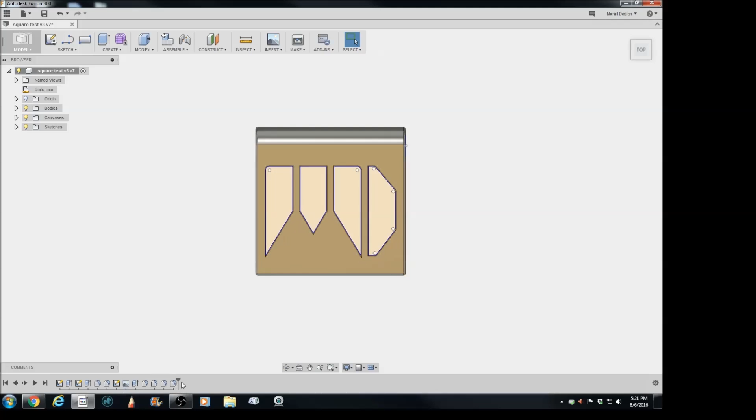So this is Autodesk Fusion 360. You can see I've registered under my business name, Morale Design. This is my logo, and we'll see when that comes into play, because there's a feature tree on the left-hand side that tracks how you create your part, and it also has this breadcrumb trail showing all the features used to create it.

This is a pretty simple design. I just wanted something a necklace would pass through, so it has a pass-through here and goes out the other side.

I'm still learning the software, so forgive me if I'm not using it the best way — there are a lot of tutorials online on YouTube for Autodesk Fusion 360. This isn't going to be one of those videos; I'm not doing instruction. I'm just showing you the process: you can play around with software like this, then upload it to Shapeways and try to merchandise your YouTube channel.

Assuming your YouTube channel isn't geared around CAD work or 3D printing, you might be doing something like social commentary or comedy, and you might feel put off from doing this kind of stuff. But really, it's not as difficult as you'd think — they teach this in high schools, so it's not hard to pick up. You just have to give yourself permission to really have at it.

So let's take a look. We'll start at the beginning where you create a sketch — you can see I kept it simple and small, 20 millimeters, just big enough to be like a pendant size. So once you get the base shape down...

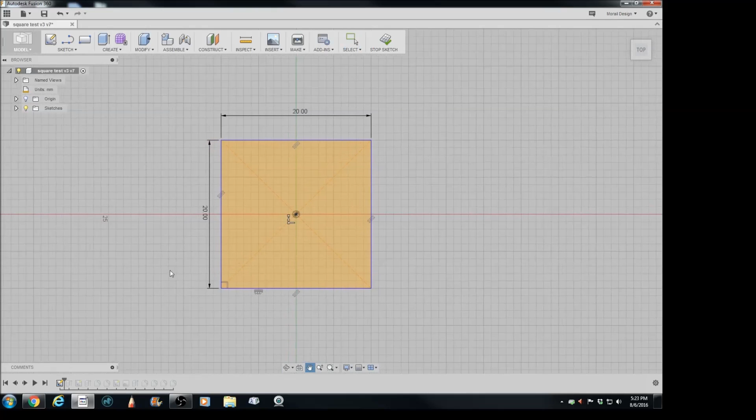Let's see if I can do this — stop sketch, and then you extrude it. You can see first you create the sketch, then you make the feature based off that sketch. If I'd made an octagon, it would have been an octagon; if I'd made a circle, it would have been a circle. But I told it to make a square and extrude it out.

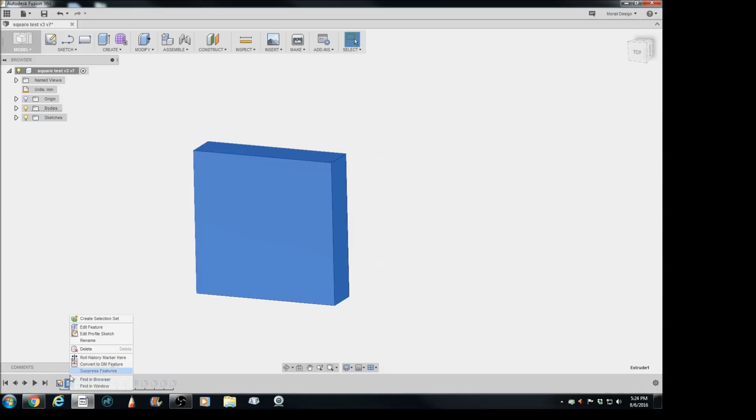How much did I extrude it out? Let's see — edit feature, 5 millimeters. It gives you handles where you can change this kind of stuff. It's a pretty interesting tool; looking forward to doing more work with this.

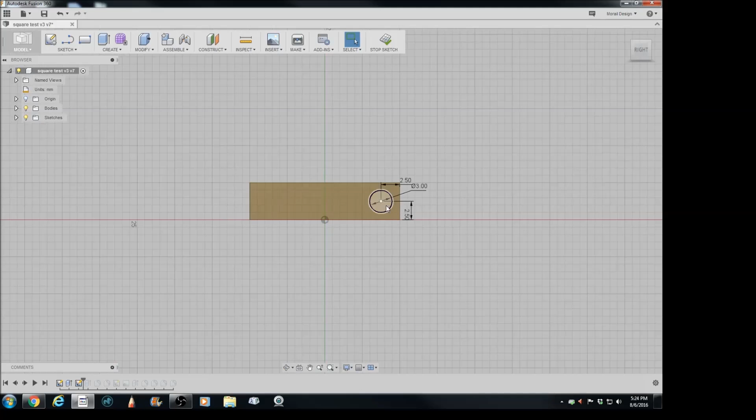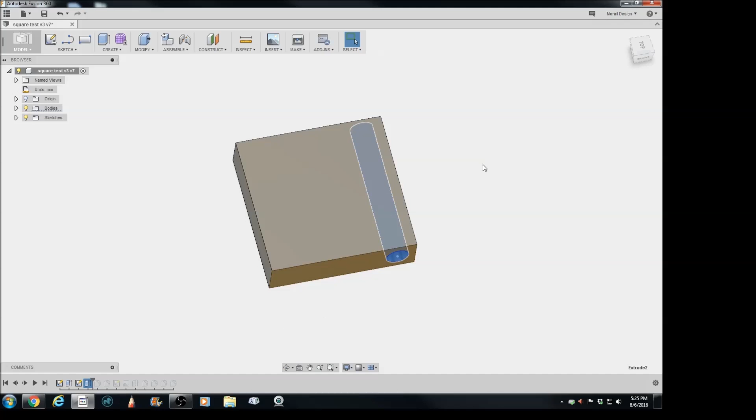The next feature would be creating the hole going through it. In this case, I used this face as the plane to create the geometry, and once the geometry is created, you make the feature. Again, it's sketch, feature, sketch, feature — that's essentially the way things go in CAD.

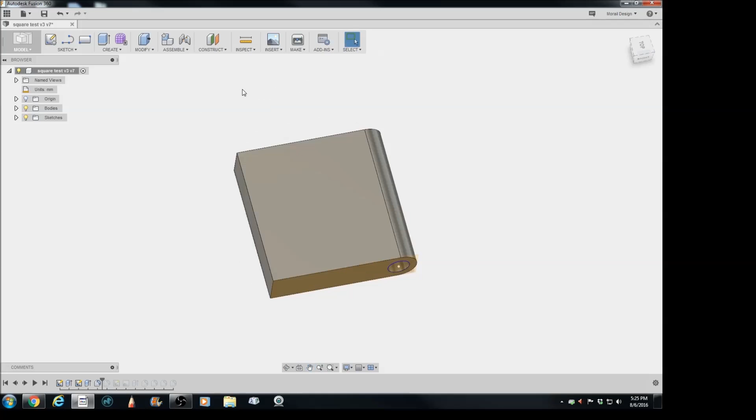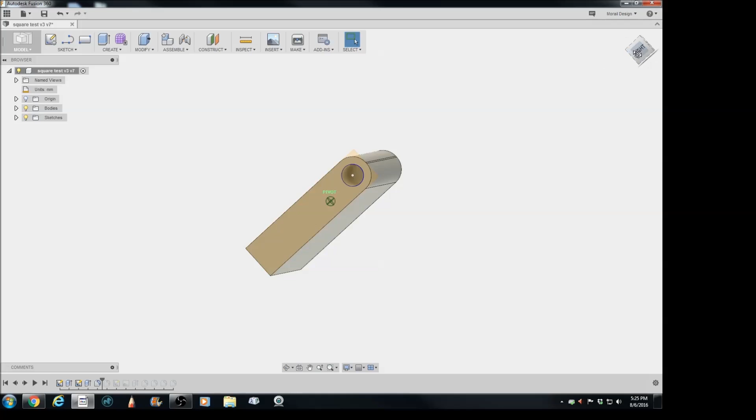You create your base geometry and paint your picture, then you use your features to make it three-dimensional. So now this hole goes through it, and then I created a roundness called a fillet on both sides. So now you don't have to pay for that much material when you go to 3D printing, because some of it's based on the overall volume and size, and they charge you based on how much material you're using.

So anything that's not a value add, I'm going to have some spaces where it wasn't a value add, and we'll go over that. But right now it's one big hunking block. So again, more fillets, radius out some areas, break the edges, because you're going to be wearing this as a pendant, and you want to limit the amount of sharp areas on it.

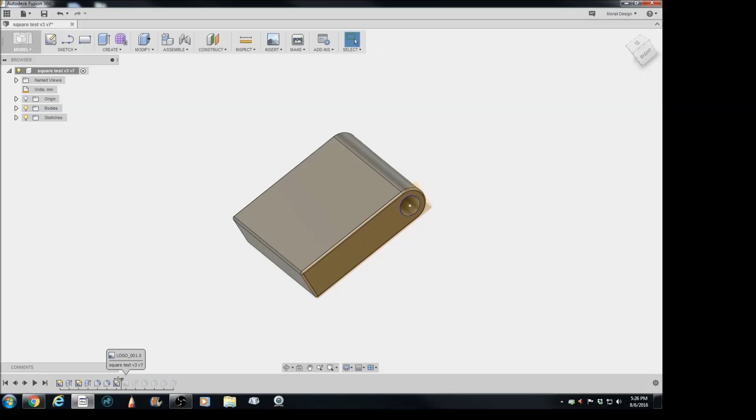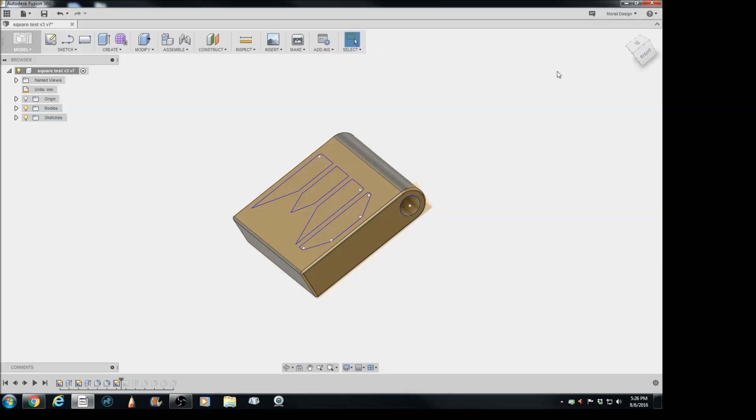And then I inserted it. You can go to the insert tool, insert a picture, and I did that with my logo. I have a bunch of pictures of my logo. You can see it in the lower right hand side of my YouTube video, where the logo is able to pop up on you. And because my logo has a lot of straight lines, it was easy to trace over the logo.

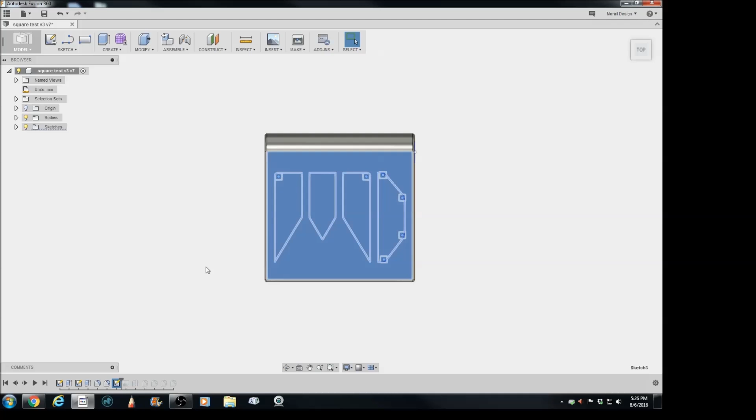And of course, being a CAD designer by trade, I went through and dimensioned it all too. So if I actually went into this and took a look at it, yeah, I dimensioned it all.

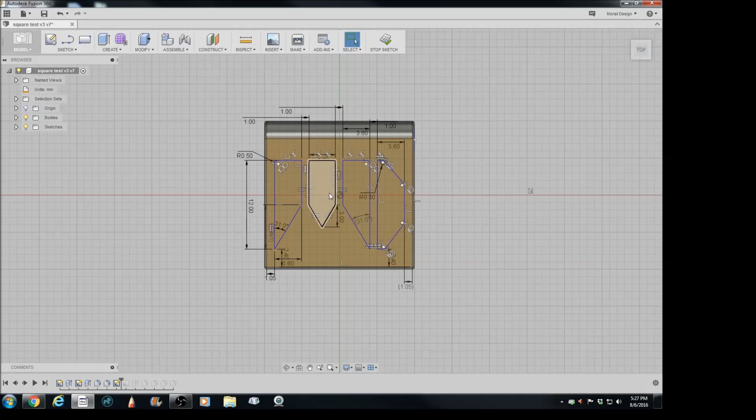I wanted to make sure that I had at least a millimeter for the rails, because the 3D printing method used in Shapeways states that if you have walls that are less than, I think, half a millimeter, they're not going to bond right. So I doubled that, and I think I should've even gone thicker, looking at the piece now. But I wanted to make sure I had rails that were thick enough to survive the additive manufacturing process, and make sure the sketch itself is kind of centered.

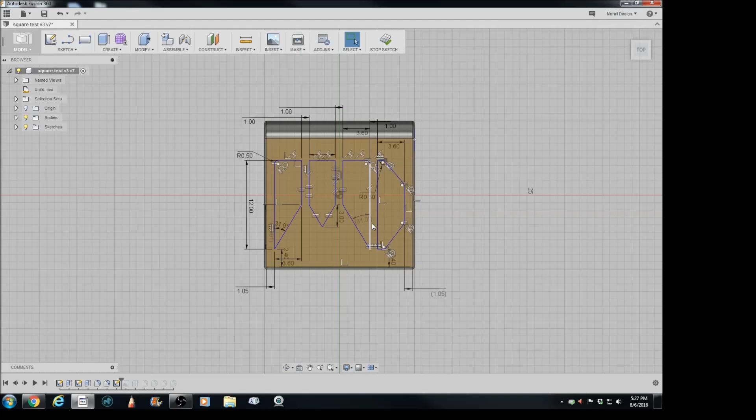So I took some reference points and made sure the overall logo is centered on the piece itself. That was fairly simple to do, and these are all the sketch tools that you can use. It's not difficult at all. So let's see, the next step was...

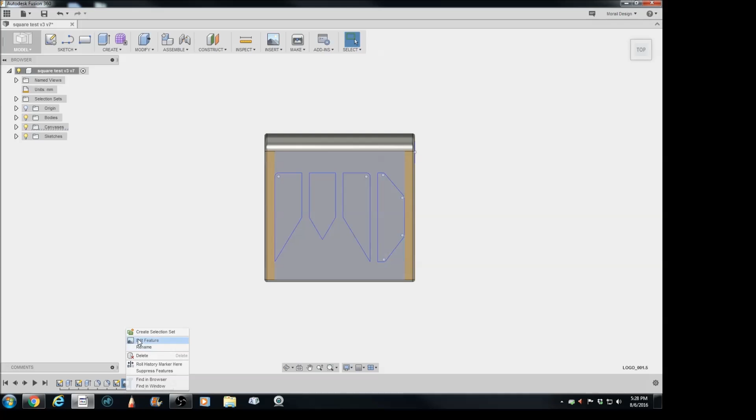Oh, this is the image. It still retains the image. So as you can see, the sketch came away from the actual image. So however I made this, it looks like this is a little more spread out than the actual image by a bit, because you can see some of the after image from here and here. So my actual logo is a little more condensed than the 3D printed one.

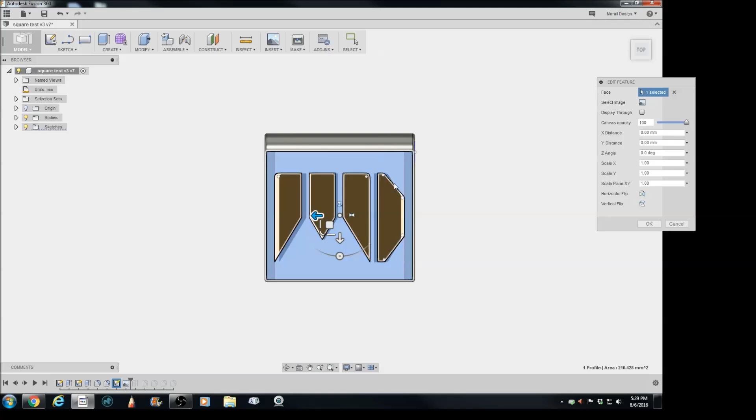Could be part of the conversion from JPEG to the application I used to make it, to importing it. I also, you can see in my logo I have a thicker boss on the top and the bottom of the D, where the angle I used didn't really match the logo, but that's okay. I think the overall intent was maintained, so we're good with that.

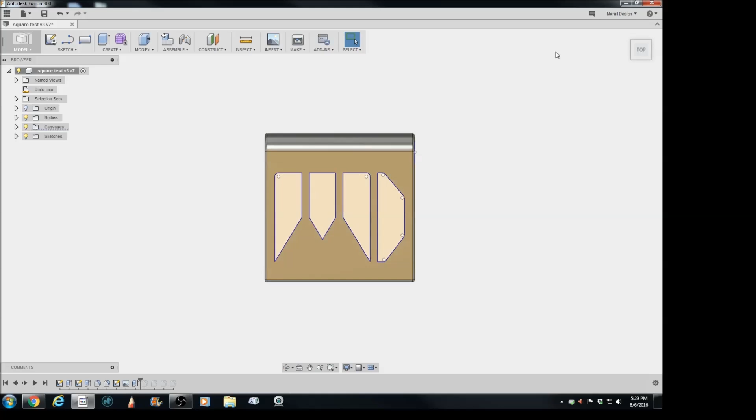So the next step would be to create a feature using that sketch and create a cut through. Now the cut through is going to save me a lot of material. I still have this great expanse of material here, but that's not really a showstopper. I'm not using a lot of material here, so I feel pretty good about having a couple of areas where the space isn't really being saved. But I do need to make sure this is kind of pronounced as the M.

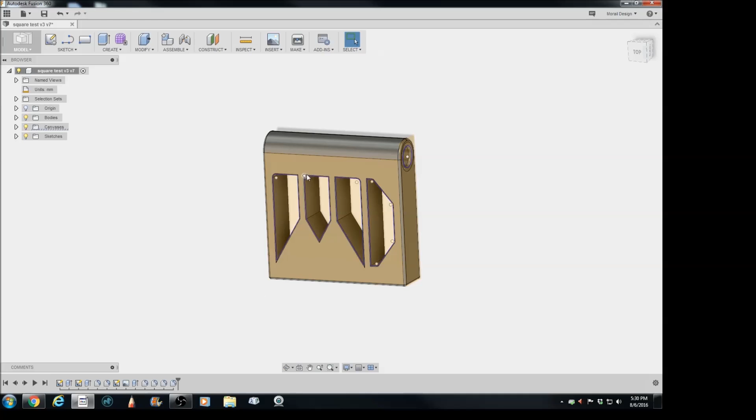And then radiusing the inner edges and the outer edges. So that's pretty much it.

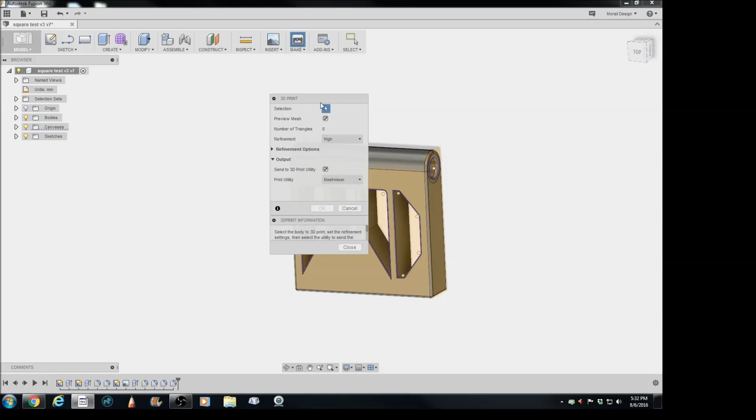Okay, so now the trick is how do you get into Shapeways? So let's go to File, and you go to Make, and you see a bunch of stuff. 3D print, let's try that. Print utility, mesh mixer. So you hit Make, go to 3D print, and you have to select your geometry.

I don't understand why you have to, maybe if you have a multiple body part and you only want to print some of it, I guess, I don't know. But use, let's see, mesh maker - use mesh mixer and then hit OK.

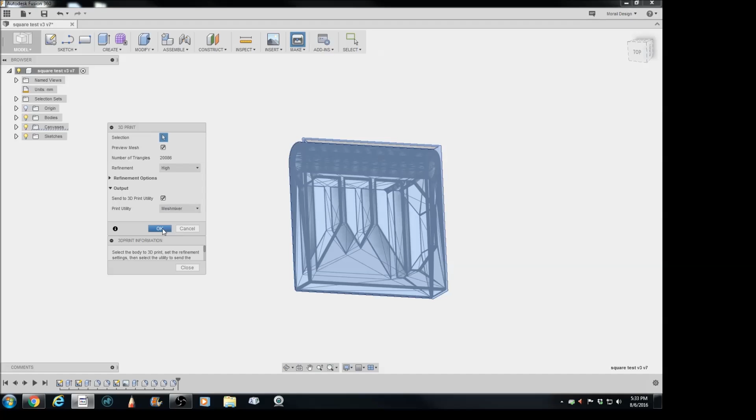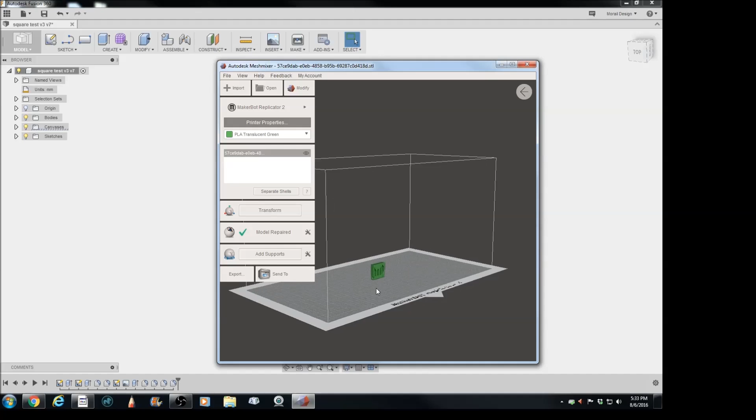And here, let's see, if you're going to put this up on Shapeways, it's going to give you a default kind of orientation. And here it's giving you the orientation which would be best suited to 3D printing if you had like a MakerBot Replicator 2. But we don't really want that.

We want to, let's see, Shapeways. Well, that's pretty good, it already has a connection to Shapeways. I think it's going to show you the unit price. This will be your price before you put any markup on it, for $2.17, and white strong flexible. So.

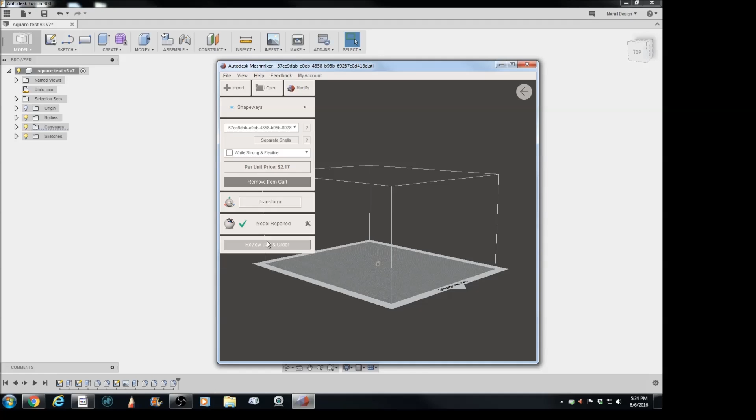So we're not going to import it directly into Shapeways. I want to export it. You can see I've already kind of exported it out because I've already printed it. So I want an STL file.

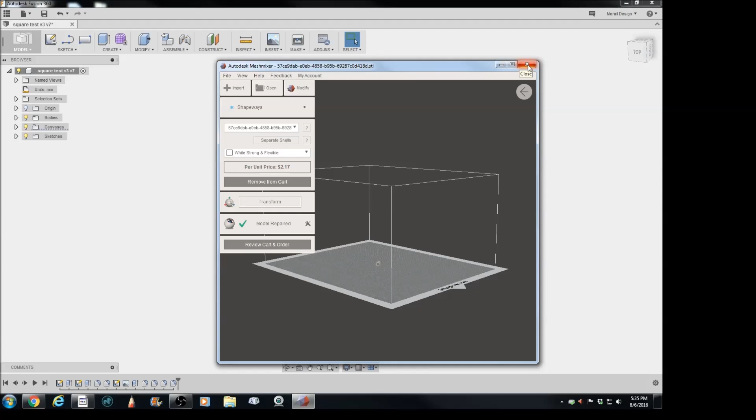So this is the file that I created. Let's cancel out this and close this up, and I'm going to show you how it looks up on the Shapeways shop.